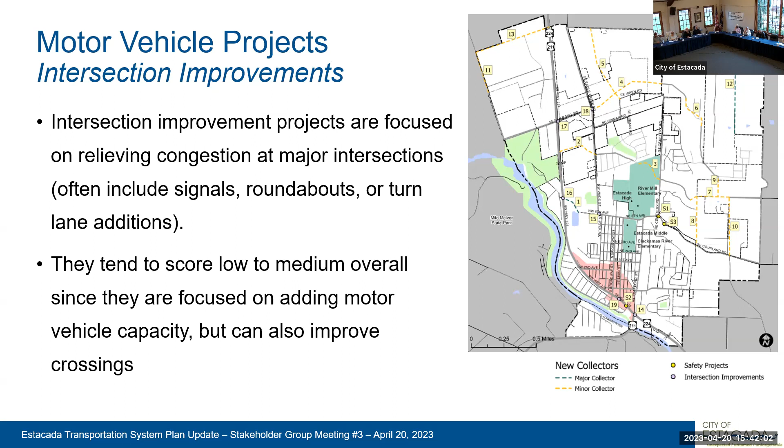Okay, I think I was saying that they can improve crossings for people walking and biking. So that is a benefit for the active transportation side. Next slide. So here's some specific project callouts. I mentioned 2 projects are going to relieve congestion from the new developments with either a signal or a roundabout. This TSP project list does not specify what intersection control has to be used, but we do have a recommendation that we are analyzing in this study. So that's what you see in parentheses there.

So Highway 224 and River Mill Road is an intersection. Number 17, thank you. And number 18, River Mill Road and Eagle Creek Road at the center of a lot of that new development. Number 14 is a proposed roundabout at the Highway 211, 224 intersection. This has the benefit of giving a more resilient infrastructure during emergencies, because roundabouts do not have to be programmed with a special signal timing. It can handle large amounts of traffic from any direction. And it would also have all the side benefits of improved pedestrian crossings, slowing people down as they come into town, which provides safety benefits.

Additionally, I also have number 15 and 16 listed relating to if and when new development comes in. Specifically, this is going through the old mill area. Wade Street and 6th Avenue would need to be realigned if, number one, the major collector is built. Because today, there's one really strong pattern of traffic coming down Wade Street, going down around the corner. But in the future, that will become a T intersection or a three-legged intersection. And then if there is a new access to the highway at 6th Avenue, then that would need to be upgraded to some sort of signal control.

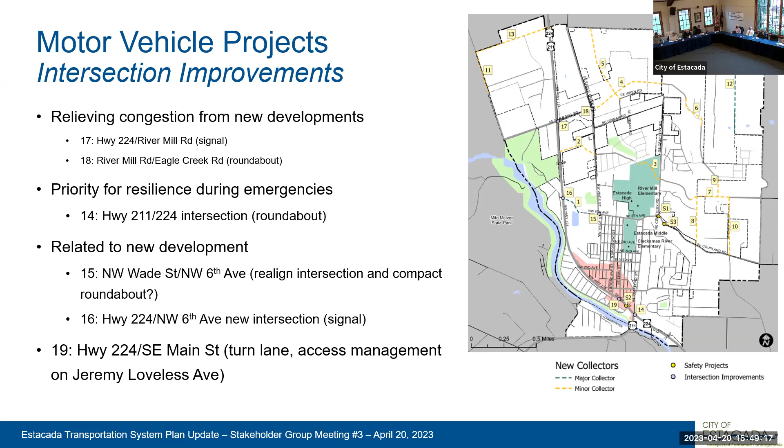So there's also the connectivity projects, as I mentioned before. These are adding new collector roadways to provide more access to the new neighborhoods as the area develops and also connect across the city, looking east-west and north-south. Do we have some through routes that are providing good connections? These tend to score low to medium overall. A lot of this has to do with them being new facilities, and a lot of our objectives and goals were to fix existing issues. So they are not necessarily the high scores on the list, but important nonetheless, as they do increase accessibility to resources for people, and more connectivity means there's more routes throughout town.

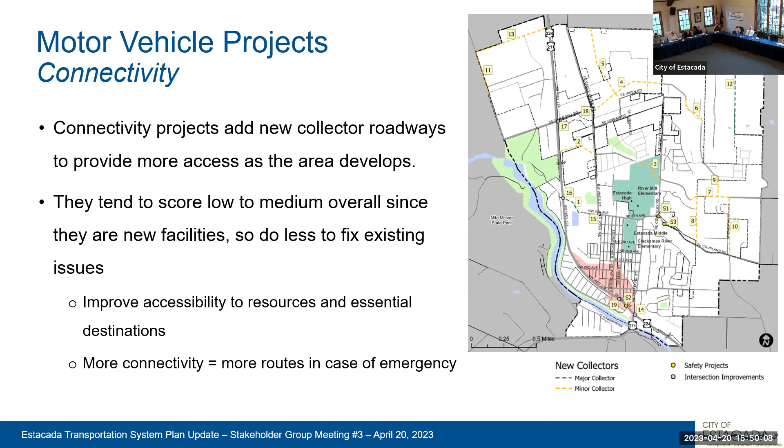Next slide, there we go. So I'm not going to go through all the collectors. They're very similar in purpose, numbers 1 through 13. This was adapted from where the old TSP was and then looked at where new developments have come in and where we can continue to connect to try and get a good north-south route with what exists today and also east-west routes. I would say some of these paths have slightly changed to try and match where new developments are, but for the most part should follow the intent of what was in the old TSP.

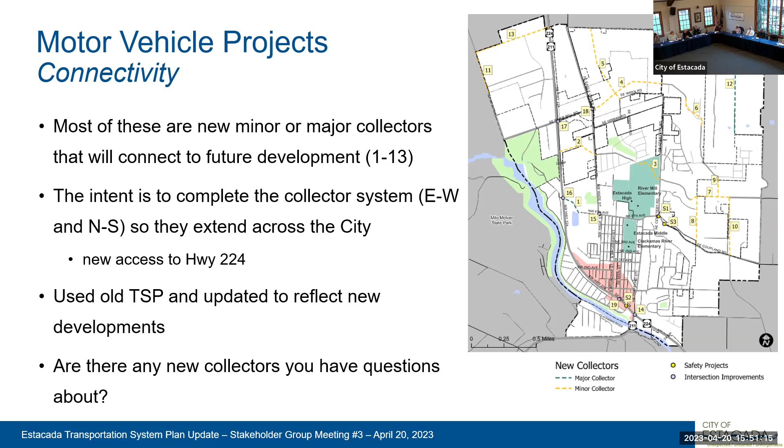Are there any questions you have about the motor vehicle projects before we move on? And if not, that's totally okay. I think we're gonna use all the time just going through these projects. So feel free to take a more detailed look at the list and let us know if you have any questions. Let's move on to the next slide.

So on this map also, you may have noticed 3 projects with an S in front of them. These are the safety projects. And I would say a lot of these projects address safety in the city, the active transportation ones, some of the intersection improvements, but these are a few that don't quite fit in the other categories. They are very focused on specific safety issues. So they don't tend to score super highly because they're not hitting all the goals across the board.

S1 is to add a left turn lane, eastbound left turn lane at Northeast 6th and Cemetery Road for people making turns there. We've heard about sight distance issues and people needing to turn there without getting rear-ended.

S2 is towards the south on the highway, which would be the Currin Street emergency signal. That's for the fire department to help them get out quicker and reduce delays when accessing Estacada and the surrounding area. And then the third one would be along Coupland Road to do two things.

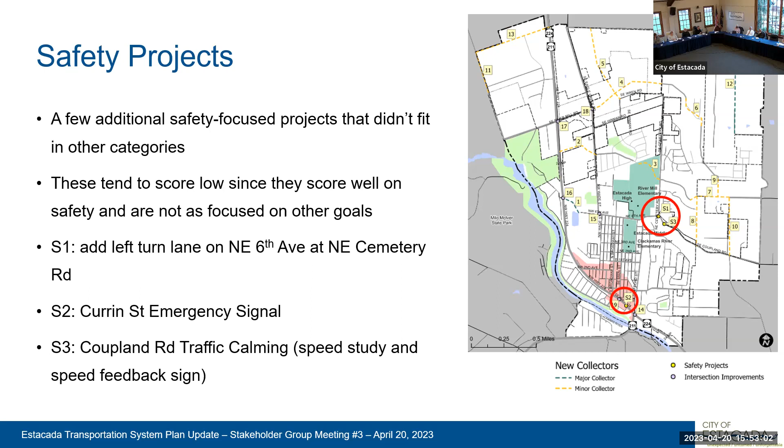One, do a speed study to see where speeding issues are along this road, and then also to install a speed feedback sign around the curve where that pointer is showing to make drivers aware of their speed as they're heading in and out of the downtown area. Any thoughts on those safety projects? Okay.

Transit. So I think we discussed this before when we talked about some of the existing issues. So Estacada can partner with the transit agencies and provide support, but generally they do not control what the transit agencies do. So these are the projects we came up with to support transit needs within the city. The first two are what I would call transit improvements. These are actual physical improvements.

They include bus stop amenities, so making the stops nicer, adding shelters, a place to sit, etc. And then there are also accessibility improvements, and these are focusing on the street and the sidewalk itself. So this is something like putting in curb ramps, having a marked crossing at the transit stop to facilitate easier access. And those are things that the city can fund.

So in the project list, we've identified, say, pick your top 5 locations that would need this. And that's what's been budgeted for. There aren't specific locations that we've pointed out yet, as you can determine that when the time comes. And then the other option for transit projects is to have a couple programs that the city can help with.

One would be an informational program about the park and ride locations around town, doing more advertising so that people know those exist and they can use those to better access transit services. And then the second one is a transit options program, which essentially, again, is marketing or advertising by the city to let people know what the transit options are. Do you know what bus routes come into town and where you can pick them up? Do you know what other transit options there are, right?

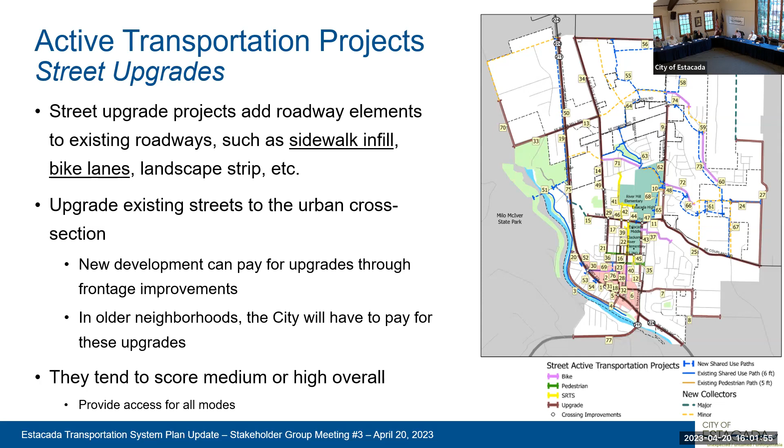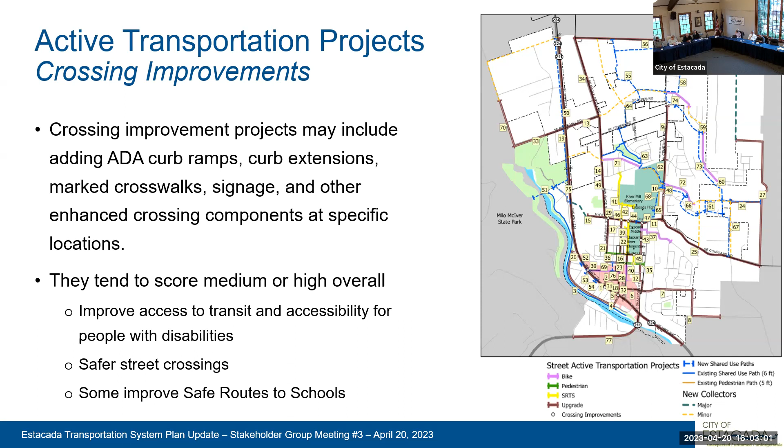Next slide. We'll talk about specifically the Safe Routes to School projects. These came from the Active Transportation Plan, and they're categorized in their own category because they're specifically aimed with helping the routes people use commonly to get to school. And because they're trying to facilitate walking and biking, a lot of these include things we've already talked about, like adding signage, adding sidewalks, pavement markings for people biking, crosswalks, all those classic walking and biking improvements.

The key thing about Safe Routes to School projects is that they are often funded by grants. That's a great opportunity to get other funding if you can specifically target Safe Routes to School. And they definitely score medium or high. Again, they're kind of coming together of all the different types of improvements we've been talking about. Safe Routes to School really hits the nail on the head there. It improves access, it improves travel options for people, it improves safety. And those were in yellow, if I didn't mention that on this map, so you can pick them out. I think I mentioned they're obviously around the schools, but those are in yellow.

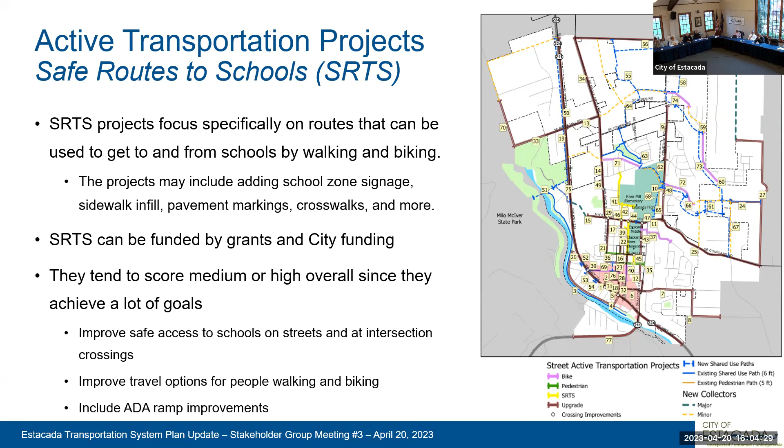And then on the next slide, we have the pink and green lines. So these are separate, either pedestrian or bike only improvements. We kept them separate from the street upgrades, so you would know they're just doing one thing. And those are doing pretty much what it sounds like. For bikes, they're either adding in bike lanes or sharrows where they would be needed on a collector roadway, for instance, and a general sidewalk infill. So if a road looks great, perfect cross section, it just doesn't have sidewalk, that's the green line, as opposed to the street upgrades. These are mostly on existing facilities, so they would likely have to be funded by the city, not related to new development, and they score well, again, for the reasons that all of the active transportation projects do.

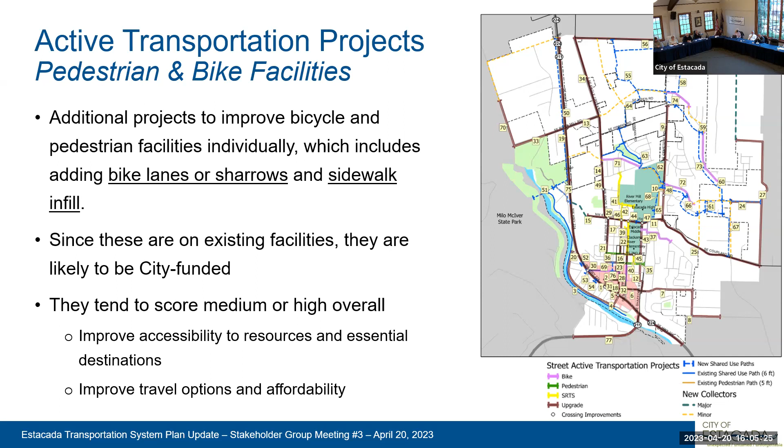Next slide. So this is the last category of active transportation projects. They are the dashed blue lines, which show new shared use path or trails. The dark blue lines are the existing trails, so you can see where they connect in. And the idea was to really create a system here of paths and trails to provide alternative lower stress facilities for people walking and biking. So for both travel options and for recreation purposes, people may want to walk or bike on a less stressful street. So that is what the paths and trails are for.

They do tend to score lower for some of the same reasons that the new streets scored lower, which is you're building a big new path and it's going to address travel options for people walking and biking, but it's not going to fix as many existing issues or existing deficiencies. And I also put a note here for funding. There's potential to partner with the Parks Department if you're using trails to promote tourism, perhaps along the riverfront or through your parks. That can be a good opportunity because otherwise you have a pretty big aspirational trail system. And those will definitely have to be prioritized.

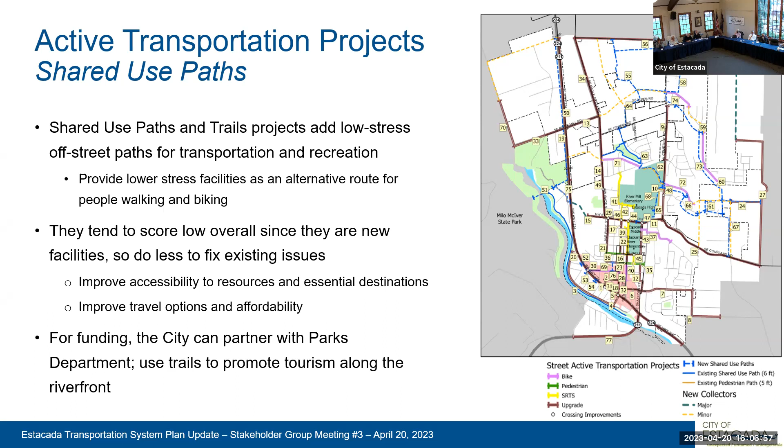Okay, next, thank you. So this is the project highlights page. I have a few projects I pulled out as an example of the categories we just went through. And then I would also love to take any questions on these projects or comments on which ones strike you as the most important. So an example of a street upgrade project would be number 14 going down Eagle Creek Road and Wade Street. And the improvements needed here would be the urban upgrade, adding sidewalks, curb, bike lanes along that whole section, which would also help with accessing transit, since that's where the bus line runs and there are many stops on the side of the road there.

An example of the crossing improvement project is one we heard a lot about, which was at the Highway and Broadway Street at the signal, not having enough time to cross. One of the options is to add a leading pedestrian interval, giving pedestrians a head start on crossing the street before cars can start turning. An example of a Safe Routes to School project is number 39. Sidewalk infill on Northeast 5th that goes along the school, connecting that last part to get to the school.

One of the pedestrian projects, for example, I think you get the gist, but Northwest 2nd Avenue sidewalk infill, that's an area that's needed and could really double as a safe route to school, depending on how you frame it. And then a shared use path project number 62, along Hill Way, would connect between existing roadways through the park area near the school. Great option for a trail connection there. So those are some example projects. From that whole list, there's like 70 something active transportation projects. What are your thoughts on priorities for these projects?

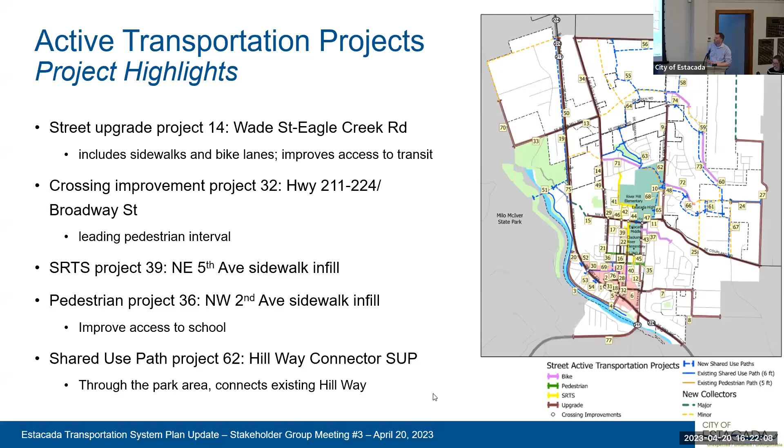All right, go ahead and go at least one slide forward. So standards, a lot of stuff in here. As time permits, I will definitely go through street functional classifications and cross sections. I think those will be of most interest. Maybe we'll get into mobility standards and access spacing too, which I think will be a very quick discussion. So go ahead. Street functional classification changes.

So your street functional classification, if you're not as familiar, there's a map in the current TSP that identifies whether streets are arterials, major collectors, minor collectors, or local streets. The arterials and collectors are generally designed to carry more traffic. Usually you need separate bike facilities on those because you've got more traffic, as opposed to a local street where it might be okay to ride in the street. So the designation of these also links to the typical cross sections that you see in the pages following this. So the design of the street is determined by its functional classification.

So we did make a few changes as we were updating this. And those being Woodland Road over here from Lawrence to the west terminus will be extended to Gardner Drive extension as a minor collector. So here, that route there.

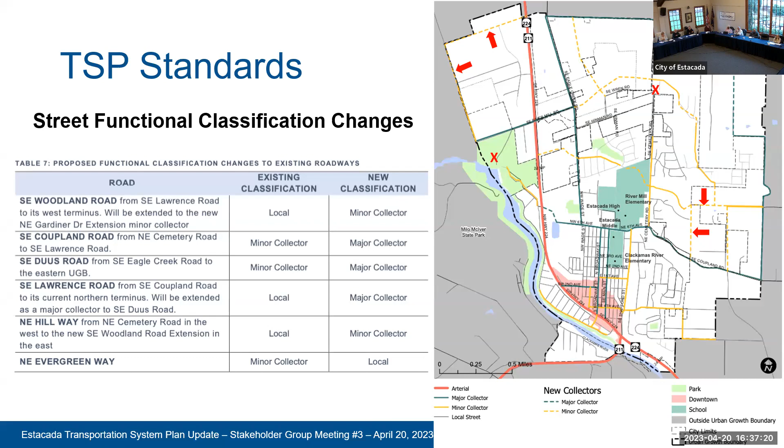And a good example, unfortunately, is maybe some of these streets that weren't built to minor collector standards when they were intended to be. And I noticed there's a lot of houses right along them with driveways, right? Which typically you would not do on a minor collector; you'd want them facing to a local street. And so there could be some conflicts of expectations. Obviously if you live on that street, you might think it's a local street, but it really wasn't. And I think in some of these cases, they weren't in the last TSP, or they currently aren't. So I think those are probably the most obvious near-term potential conflicts.

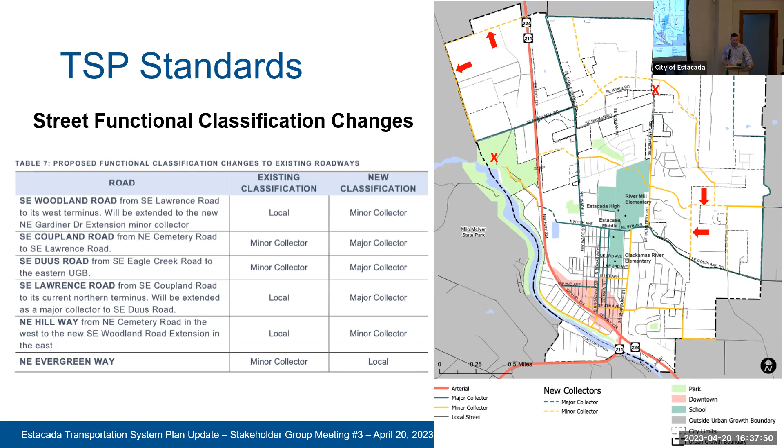Let's see. I'm trying to, time management question here. I've got MIG folks who are going to give you an overview of the proposed code and policy amendments that would go along with this TSP. I'm thinking about making them start on time. And when they're done, I can come back and get into standards. And if we run out of time, I have nowhere else to be tonight. I'll stay as late as you want until Taylor kicks me out.

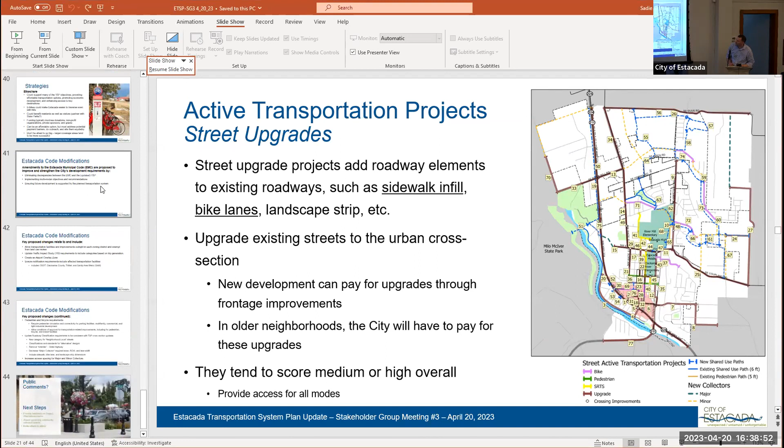So how about Matt? Are you there? I am here, and Brandon's here as well. I think probably Brandon's going to cover those slides for us, but yeah, we're here. All right, Taylor, can you maybe flip forward towards the end of the PowerPoint? There were, I think, 3 slides near the end. Just below that, right there. All right, there you go.

All right. Hey, everybody. I'm Brandon Crawford. I briefly introduced myself at the beginning. But yeah, I'm with MIG here with Matt Hasty, and we worked on some draft code amendments to help ensure that the development code is consistent with the proposed TSP updates, and also that the development code will comply with the state's rules for transportation planning, otherwise known as the transportation planning rule, which is statewide planning goal 12? No, I'm blanking on it. 12, you got it. 12, okay. That was a close one.

So most of the revisions are fairly minor and we can breeze through these pretty quickly. So I'll just go through it at a fairly swift pace. So yeah, as I mentioned, these are proposed also to improve and strengthen the city's development requirements.

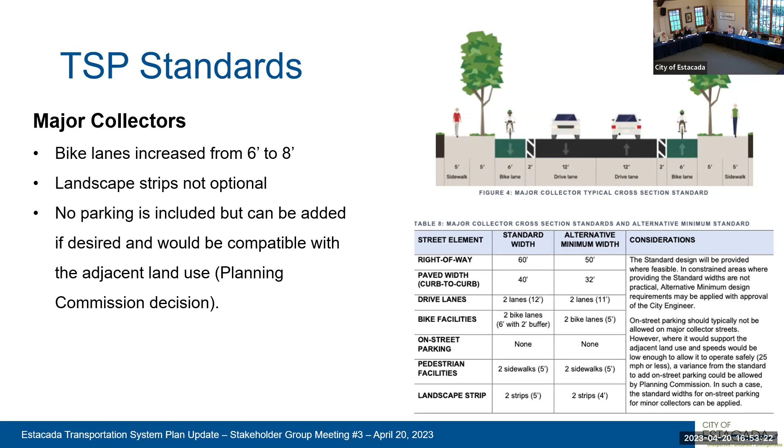Next one is minor collectors. So currently there are 2 different standards for minor collectors based on what the projected average daily traffic is. We simplified that and just went with one, kind of combined them. So again, we increased bike lanes from 5 feet to 6 feet. 5-foot bike lanes are really narrow.

Parking: to get it to fit within the 60-foot right of way, if everyone agrees that is really important to do, we had to tighten up the parking from 8 feet to 7 feet. And then landscape strips are not optional. Again, we want to provide some buffer for people walking. And we had to tighten those up a little bit, about 1/2 foot from 5 feet to 4.5 feet to get everything to fit within that 60-foot footprint.

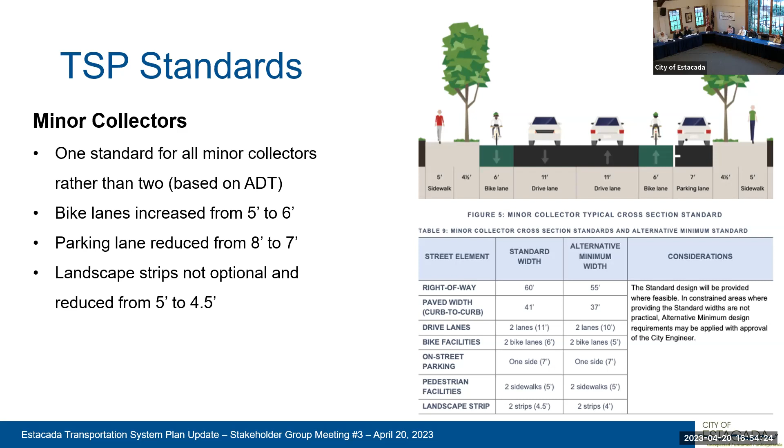And then next one, local streets. So we have 2 different standards for local streets. The basic local street, the one that I would expect you'd be building 95% of the time. Here, parking on both sides is not optional where it was before. Landscape strips are not optional. This one comes out to 56 feet. A little odd. If that was appropriate, we could just make it the whole 60, but it's similar in size, but a little bit more compact than those other streets.

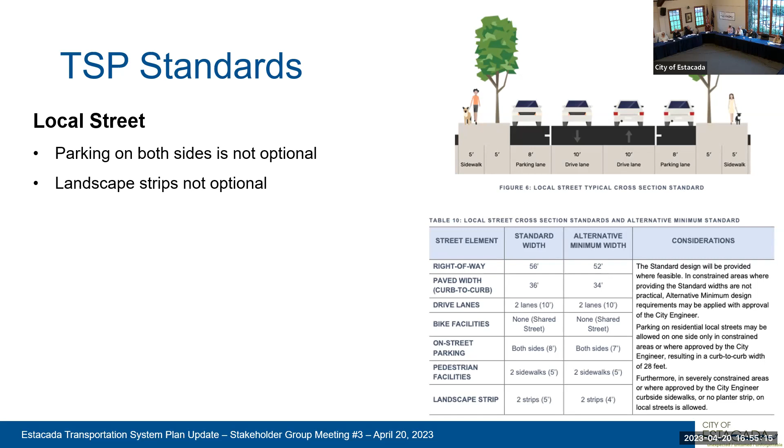That does mean we have 10-foot travel lanes, so it's 20 feet of clear width, which does meet fire code for the clear width between the parking. And then if you go to the next one, you're required for the transportation planning rule to have what I call the skinny local street to minimize how much land you're using for these streets. And your current TSP has it. It's I guess built within those options, right? If you choose the right options, you've got it in there.

So we have it in there. It's what I call the compact version of the local street. The big differences are we just have parking on one side of the street. It is an 8-foot parking, but we have to maintain that clear 20 feet to meet the fire code. And here the sidewalks are what I call curb tight. So there's no buffer, there's no landscape strip. So you're right there next to the street. So it's not as comfortable of a pedestrian environment.

And the aim here is to give the city more clear control over when and where you think it's appropriate to build these streets. We provided some parameters in here, but I'm certainly open to hearing more about what parameters you would like to have in there and what you think are appropriate. The guidance that we put in here says that the application of this design is recommended for local streets with a projected average daily traffic volume of less than 1,000 vehicles per day. That's roughly like maybe it's just serving 100 homes.

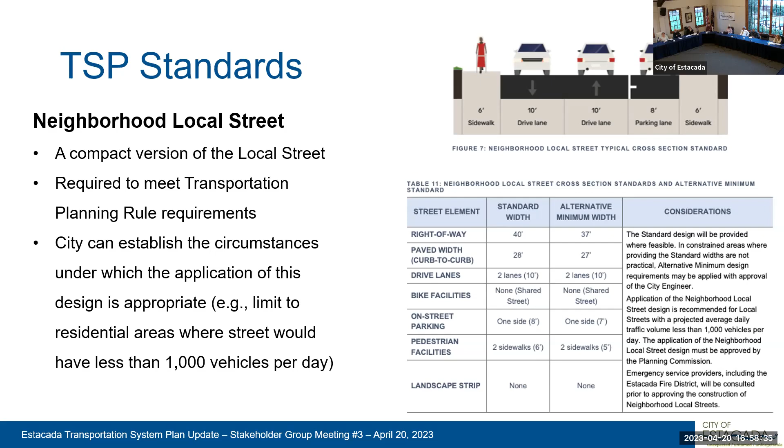Are there gonna be some standards for the landscape strips? Because in my neighborhood, they didn't go in till the sidewalk went in. The developer develops the subdivision, and then as a house is built, that's when the sidewalk goes in. Maybe it's different now. But everyone did different trees, and some people did plum trees. So you walk by their house and there's plums all over, and they aren't eating plums, they're yucky plums.

The sidewalk's covered with these plums, and then the roots. I think it's important, if there's gonna be trees in there, that you're picking the right kind of tree, because then your gutter drains, or you'll see a sidewalk lifted up out of the ground because of a tree root. Yeah, we wouldn't address that in the TSP, but where I live, the city has a street tree program, so that's where that would go.

Yes, I used to have a plum tree and it was beautiful in the spring with the pink blossoms. In the summer, the kids would run in the house and you'd get purple stains all over your carpet. And there's bees everywhere.

But what the city does is they have a small selection of trees that you can choose to avoid those problems. They learned from the past. They're looking for trees where hopefully the root balls aren't going to push the sidewalks up, and at least you don't have 15 different options, so the trees kind of match. So we might have to update that; right now we have a street tree plan, but it's only for downtown.